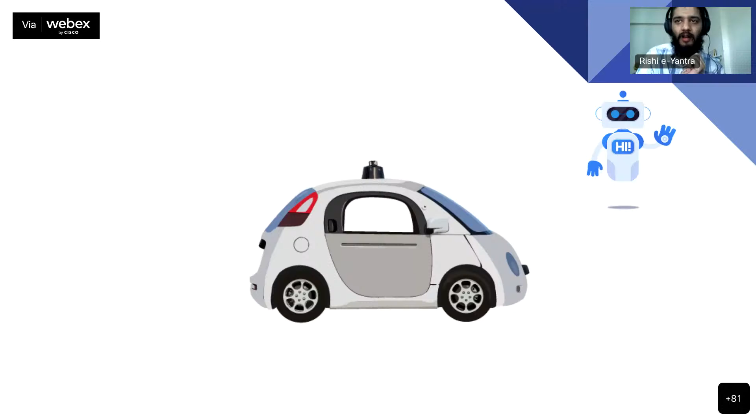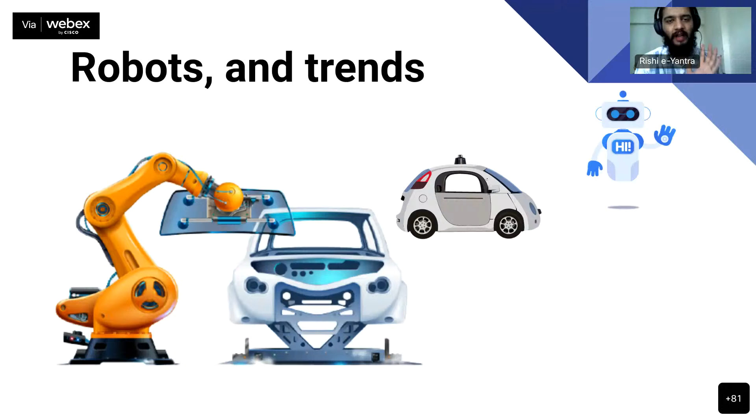But you know what the reality is? Most robots in this world today, the overwhelming majority, like 95%, of robots in the typical sense are industrial robots, which just do one task from A to B. They're programmed and they'll do just that. If you come in their way, they'll injure you. They are not endowed with intelligence — you program a task and they'll do it very well with the highest quality and consistency. So let's put all of these things on an axis.

So today, why did this change? On this horizontal axis, we find ourselves with robots that have sufficient prior information of their surroundings and of their task. So this robot which puts a windshield on the car, maybe just before it, another robot comes and puts the epoxy resin that actually sticks the windshield to the car very accurately, and this guy just picks up the windshield with suction cups and puts it there. So it has all the prior information. The body of the car will always be precisely aligned, and everything is perfect in a controlled environment. And it is doing a single predefined task.

Getting there will involve, let's take the vertical axis first, doing multiple predefined tasks. So instead of one robot applying the epoxy and another the windshield, maybe one robot can do both the tasks. But yeah, this is just a toy example.

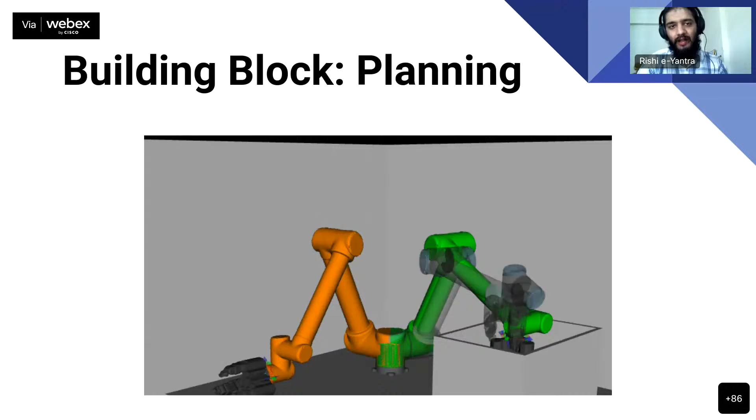There are a lot of different planning algorithms. This is motion planning for manipulators. This example here is a sort of randomized tree graph, called rapidly exploring random trees. Typically this class of algorithms, for a mobile robot that wants to get from A to B, if it knows its environment, can create an optimal path through that environment, avoiding the obstacles and so on.

Then comes control. Now you want to decide, in this image you see here, that you want to do a flip — how do you actually do it? You command the motors with certain torques, velocities and angles again.

These are MIT's mini cheetah robots, pretty cool ones, low cost as well. So this is the domain of control — commanding your actuators properly, taking into consideration their parameters as well.

This is what an actuator typically consists of. The robot you saw, the mini cheetah, has about 12 of these motors essentially, and it's not just the electromechanical aspect of these motors, motor control and magnets, but also a lot of electronics and software involved to actually control these things, because they are commutated electronically.

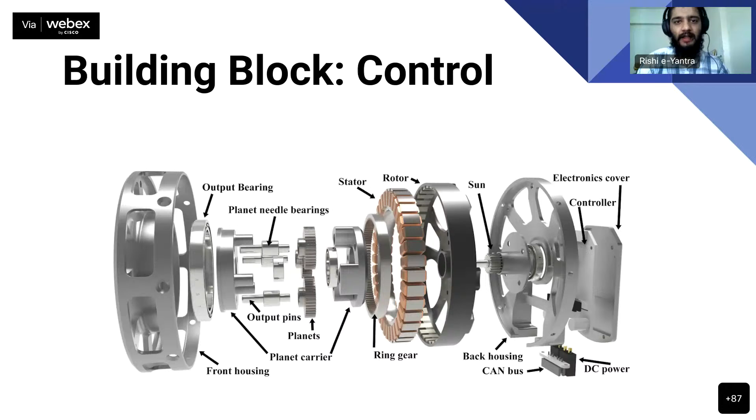It's the tiniest of movements that this motor makes. There's actually a bunch of MOSFETs turning on and off very rapidly, controlled by a microcontroller, commanding these things what to do at a very high rate, on the order of megahertz even.

So yes, this is the actual controller board. You'll see a lot of MOSFETs, a lot of capacitors, and on the other side you'll see a microcontroller as well.

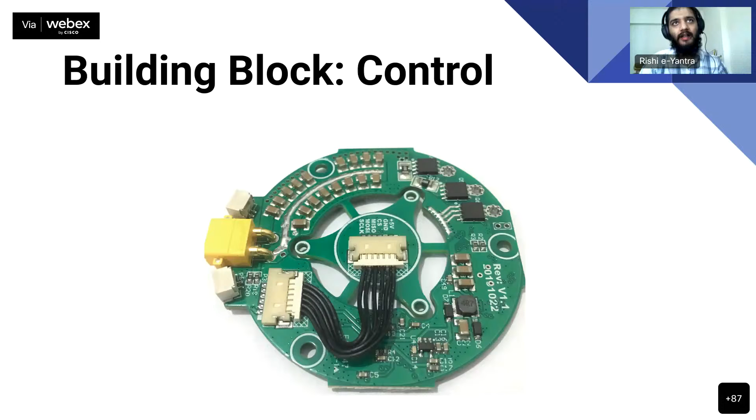So moving on to some theoretical underpinnings, one great thing about our field of robotics is that it involves theoretical underpinnings from a whole wide range of applications - everything from control systems to image processing, computer vision, to now machine learning, and at the very core of it, math basically, and software practices like in software development.

The actuators, again, a huge field in itself - you can do a bachelor's in engineering in each of these fields by themselves. So sensing, manipulation, locomotion, which is like moving around, environmental interaction and navigation, and one great field also is human robot interaction, or human machine interaction as it's also called. And then finally control and industrial design, which is very important.

So HMI is also, maybe if you're more of the designer sort, more of the thinking philosophical sort, you might like industrial design and HMI basically. A lot of thought goes into using all of the software which we use daily, and this is the same case for robots as well.

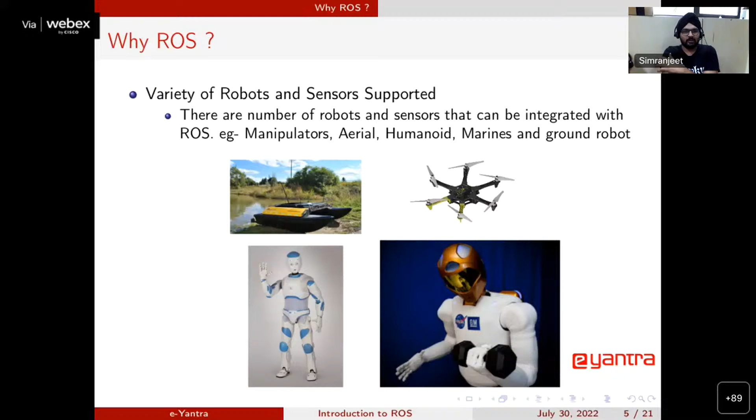Now I'll start introducing why ROS is important, what different commands are used, how we can initiate it, and how we can install it. I'll give you one example.

Let's say this is one robot from NASA. If we look at it, what are the different concepts involved to move from one position to another, and how complex this is, because to handle this sort of robotic application we need arm manipulation. This is a very different field from vision, because it needs, as Rishi mentioned, how we can design the plan for the robotic arm. Then there's the navigation concept, communication - these are dedicated fields.

Taking the example of NASA, in developing this sort of application, there will be different teams - one working on arm manipulation, a separate team working on vision, another team for navigation, another for communication. But to run this application, we need to combine all these into one, and then this robot will work. ROS actually gives us this modularity.

We can take arm manipulation from somewhere, vision algorithm from somewhere, navigation from somewhere, communication algorithms from somewhere, and combine it to make a single application. That is the modularity of ROS - we can choose different expertise and combine them to run our application.

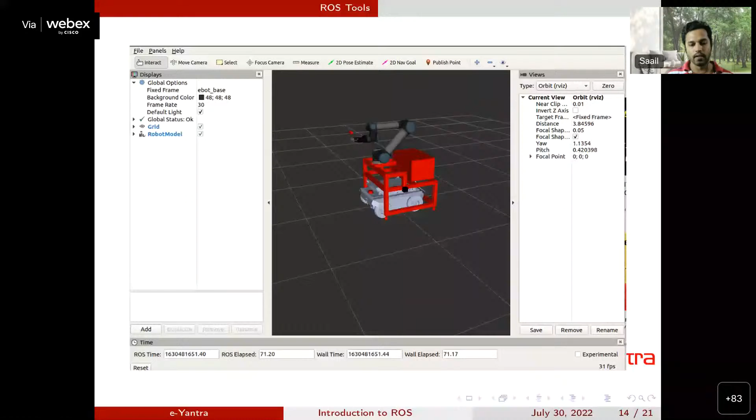If you explore further you will know what MoveIt is. MoveIt is basically an industrial standard ROS package for industrial standard robotic arms, and any other robotic arm you can use. It uses RViz to visualize all the manipulation motions, and various algorithms that you can apply in the movement. So that was the ROS visualization.

Next is RQT plot. Let's say I want to plot the ROS topic data - let's say I want to tune my PID controller or any other controller, and I want to visualize any time series data. So that I can visualize using RQT plot.

It is a 2D plot tool - basically a package developed by the ROS community. You can visualize various time series data here, and also customize as per your need. You can add whatever data you want in the graph and visualize it here in RQT plot.

Next is a very important tool named RQT graph. This is the most important tool when you want to debug something. Let's say you have created various ROS nodes, various ROS topics, and you want to find out which topic is being communicated and where communication is not happening. So this is an important tool.

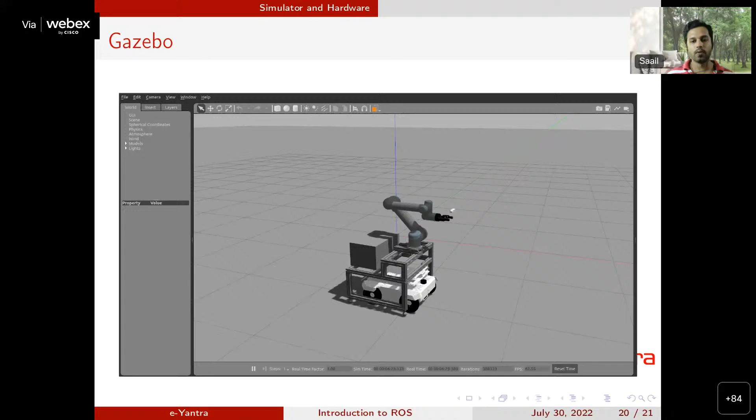You can also play and pause your simulator as per your need. And yeah, that's the basic Gazebo UI.

Next slide. So you can use ROS Gazebo in various applications. You can connect ROS with Gazebo, there is a package to connect that. Once you connect, you can operate various, you can read various topics. You can publish to various topics of the robot model. You can actuate various sensors and actuators, and you can take data from various sensors.

So that's all about Gazebo and ROS, and the use of ROS and Gazebo at e-Yantra lab.

So we use ROS and Gazebo for our various applications. We use it for autonomous ground vehicles, for UAVs, and for drones. On the left side, you see a drone, which is the actual model we have in the e-Yantra lab. We use various ROS packages for it to do autonomous navigation and all.

We also use it for the e-bot. On the right side, you see the e-bot, which is actual robot hardware we have in the e-Yantra lab. We use ROS packages, and what we do is first simulate whatever we need. We can't directly put our script or logic in the hardware, so first we create an environment where we want the robot to work, in the Gazebo simulator. We simulate the entire thing there, whatever perception, actuation, whatever we need, and then we port it to the real hardware.

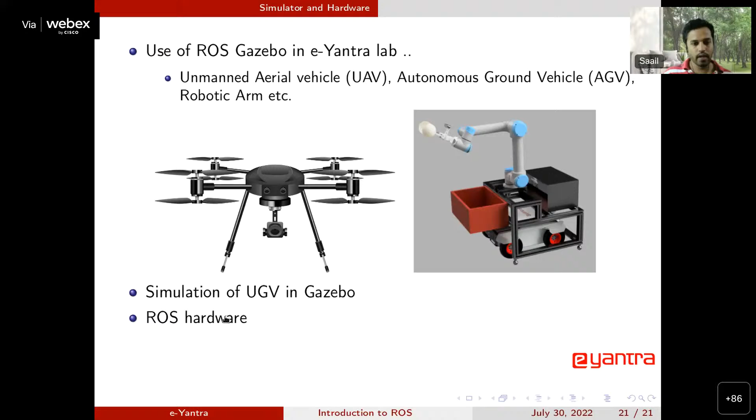And we have some videos, like last year we created the exact replica of our greenhouse. In e-Yantra we have a greenhouse, and the theme was to make the robot detect ripened tomatoes and automatically pluck and place them in the basket. That was the e-YRC theme last year. This year also we have a similar kind of theme, so do participate so that you can get exposure of this theme. So yeah, we have a video.

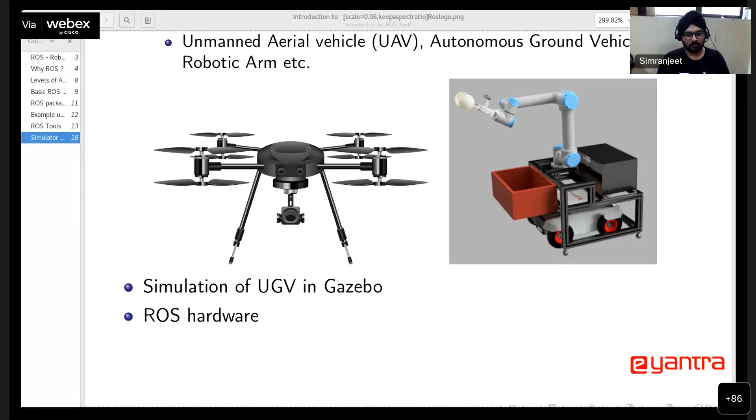Any documentation for ROS with CoppeliaSim? Yeah, there is documentation for ROS with CoppeliaSim. We implemented a similar thing 3 years back with ROS and CoppeliaSim.

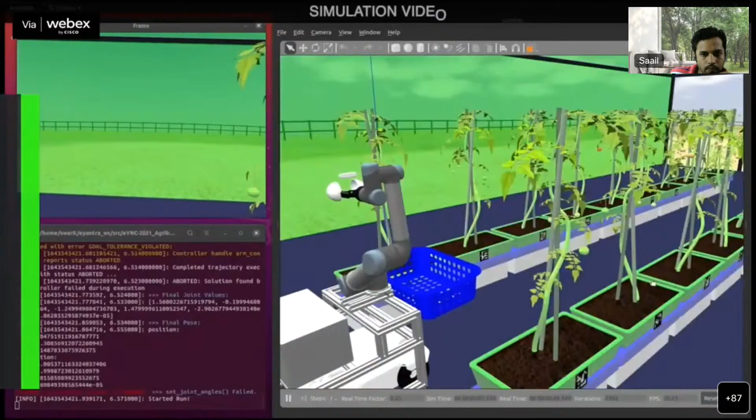Okay, so this was one of the themes last year, named AgriBot, where the robot has to detect the red tomatoes and pluck them. First, this theme was implemented in the simulator, the Gazebo simulator. This was the simulator where the theme was implemented. The exact replica of a greenhouse was created with ripened tomatoes, and you see the robot has detected the tomatoes and is trying to pluck it, then trying to place it in the basket. So all this was autonomous.

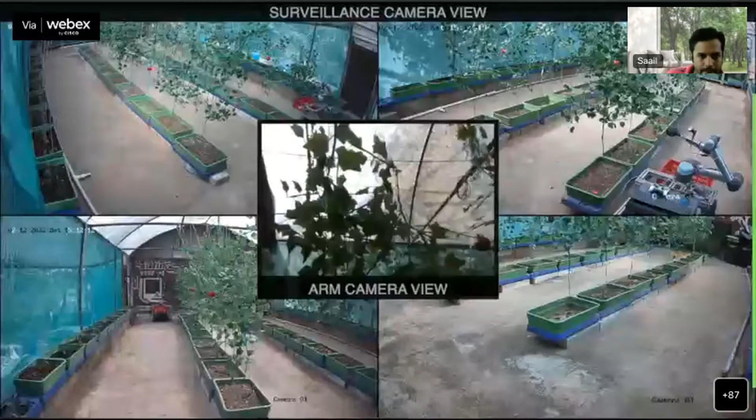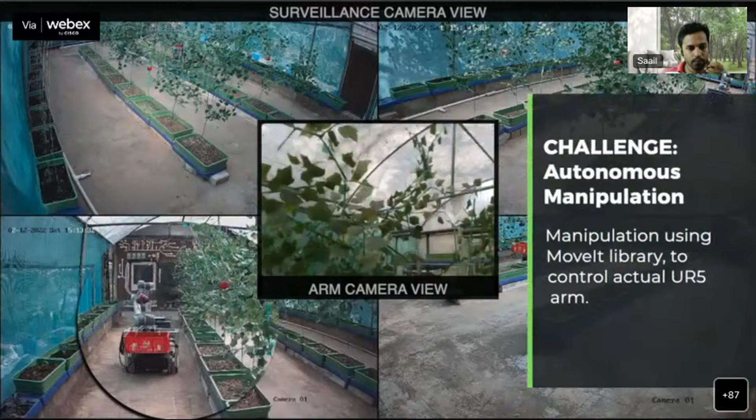And here you see the real hardware. This was real hardware where students controlled it while sitting remotely. Last year, due to COVID, we were not allowed to have all the participants here at the greenhouse, so all the participants were sitting at their homes and controlling this bot. The autonomous script was running from their side, and they were visualizing this through IP cameras. Those were the places from where participants worked. So that was all about the hardware and the simulation part.